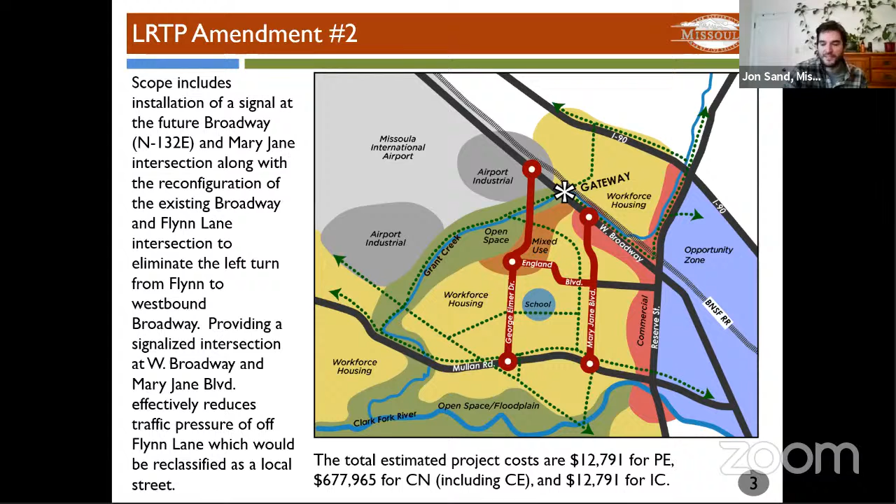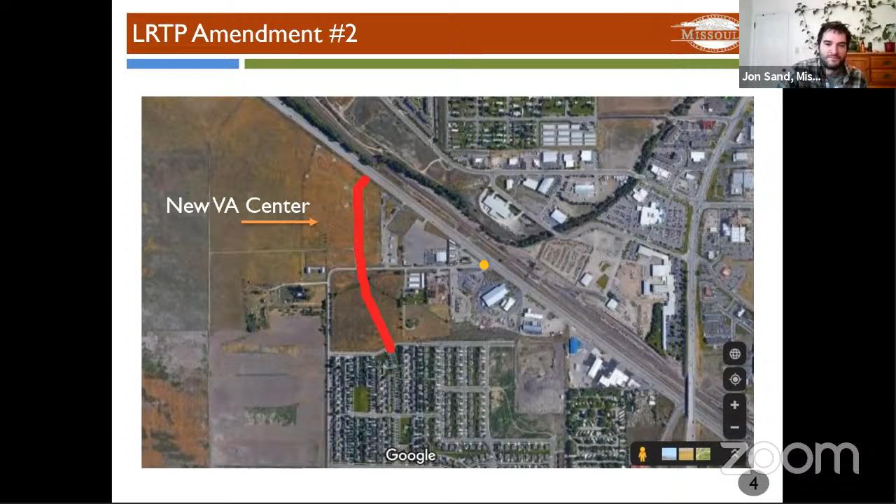Staff recommendation: approve Amendment 2 to the 2016 LRTP as proposed. Option 2: do not approve Amendment 2 to the 2016 LRTP.

I'd like to open it up for discussion, and we have some MDT folks on the line if there are some questions that I am not able to answer.

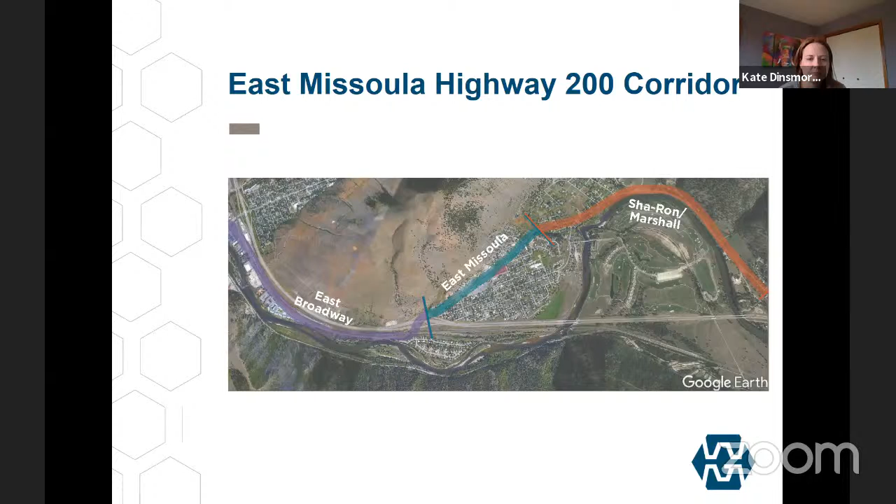We started working on this plan over a year ago, so we're getting close to the end of it. The plan was conceived out of a need to address safety issues. We started by establishing an understanding of the issues within the corridor. Looking back on our process, the first open house was in February, where we asked the public to tell us about the corridor and their concerns. We then took those comments, along with our research of the corridor, and came up with 3 corridor-wide alternatives and detailed options for 4 focus areas identified as specific areas of concern.

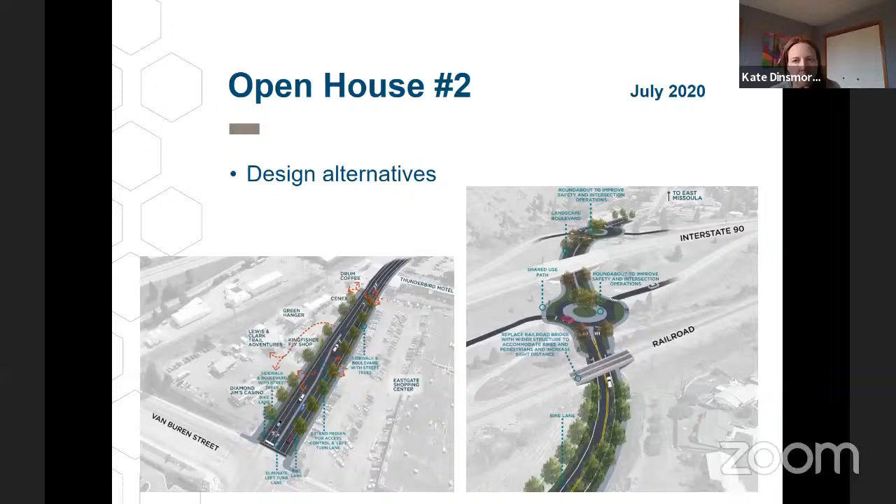During the second open house, we presented these options and asked for comments. We also posted surveys on the project website to create a better understanding of preferences for the design options. We had over 1,200 Social Pinpoint visits - that's the platform we used for public involvement - over 275 unique users, and 196 survey responses and comments.

I'm going to go through a quick review of the responses we received so you can better understand how we developed the preferred alternative. We had 3 corridor-wide alternatives: complete streets, shared use path, and sidewalks with parking. The shared use path was the most popular.

Here's a recap of what the shared use path included. Basically, it was a shared use path from Van Buren to Easy Street, and then a shared use path along the base of Mount Jumbo connecting downtown to East Missoula. People liked this because of the safety aspect and having a path separated from vehicles. They liked having a continuous path the entire length of the corridor. They also thought the shared use path would be a good improvement for both of the other 2 alternatives. The concern is that there isn't necessarily a bicycle and pedestrian connection from Easy Street to Highton Street, so we need to make sure there's still a way to connect East Broadway to East Missoula.

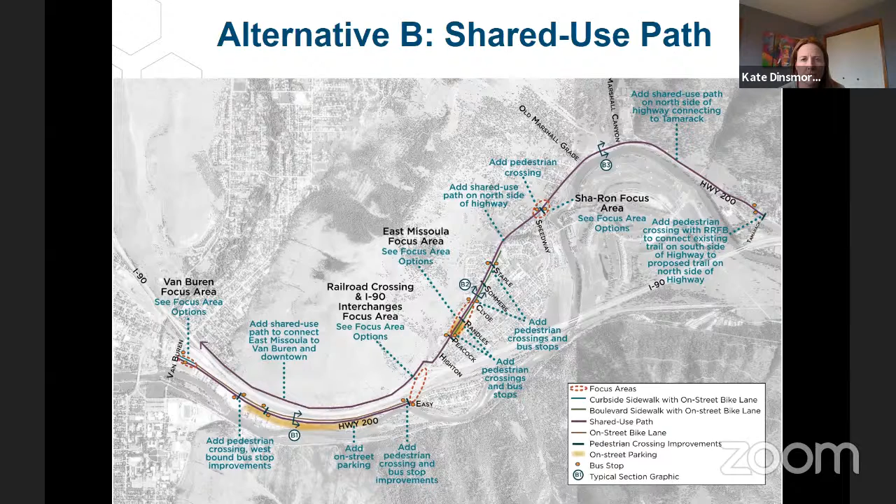Looking at the focus areas, the first one was at Van Buren, the west end of the corridor. Looking at preferences for bicycle and pedestrian amenities, there was a strong preference for a shared use path for both bikes and pedestrians, but there was also some desire to have a boulevard sidewalk as well in that area.

The next focus area was at the railroad and the I-90 interchange area. We presented 3 options here. The first was 2 roundabouts, one at each of the eastbound and westbound I-90 interchanges, along with an improved railroad underpass. The second was the Mount Jumbo shared use path - running from East Missoula along the entire base of Mount Jumbo, and then along Van Buren to connect downtown. The third option was 1 roundabout, which would have been at the eastbound interchange.

This one was a little interesting in that how we packaged these affected how people responded. Because of the roundabout or the railroad underpass, if we had included that with the other two options, I think they would have been more popular. But basically people really want to see that railroad underpass widened. There's a lot of positive feedback for that option.

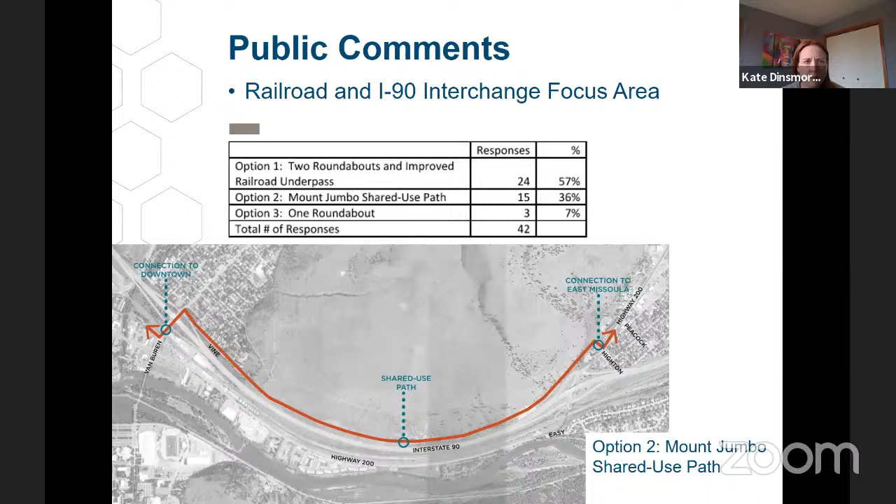Through the East Missoula area, there was a preference for a shared use path, although there's about equal preference for pedestrians between a boulevard sidewalk and a shared use path, and then a strong preference for parallel parking. We also got several comments with differing opinions on the value and safety of a raised cycle track, so there was some indecision about whether that's the right option.

We also talked about, or got comments about, which side a sidewalk should be on, which side the shared use path should be on. And then also some concerns about a shared use path getting congested, with potential conflicts between dogs, strollers, and bikes. So that was a concern.

The last focus area was at Sha-Ron. We had two options here. One was an on-street protected parking lane that leads to the west of Sha-Ron, and the other, option 2, is a parking lot to the east. Basically, there's a lot of on-street parking right now along the street that's creating safety issues as tubers try to access the river.

So option 2 was a little more popular. The reasons for that were it provides more parking spots and gets the cars off the highway, which people seem to like.

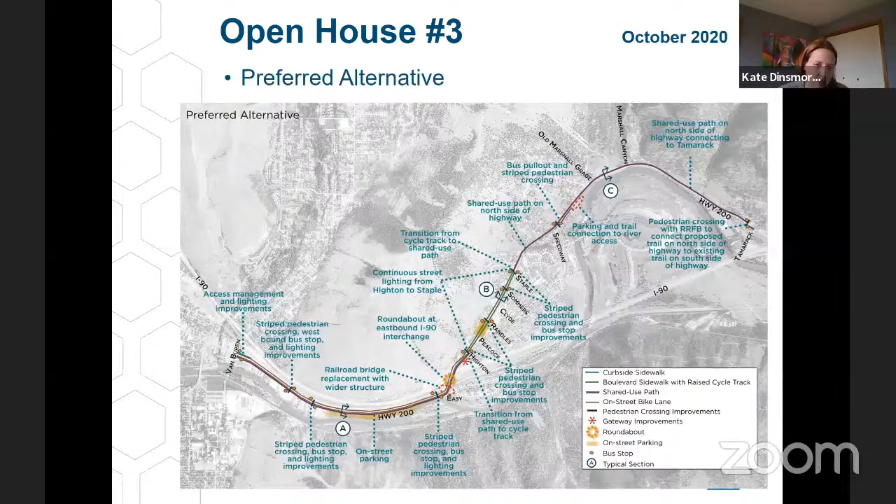So I'm going to zoom into the East Broadway segment now. For this area, there's a shared use path and on-street bike lanes provided from Van Buren to I-90.

The shared use path provides a two-way connection for users that only want to access locations on the south side of Highway 200. The advisory committee felt it was necessary to accommodate how people use the corridor, often beginning and ending their trip on the south side of the highway. This includes students living in apartments along the river and going to classes at the university.

On-street bike lanes cater to commuter bicyclists from East Missoula traveling into downtown for work. On-street parking is provided where existing right-of-way width allows, providing overflow parking for apartment complexes and events.

That area is shown with a yellow highlight, and we'll need to take a closer look at this with the final design to determine exactly where parking is needed. The committee chose to prioritize the eastbound on-street bike lane over on-street parking.

Street crossings and bus stops are improved and will include lighting. We're not proposing continuous street lighting through the East Broadway segment, but instead focusing lighting for improved safety.

Access management near Van Buren is addressed by extending the median to the east and eliminating the left turn lane at Van Buren for vehicles traveling west. This allows for better access control while creating space for improved bicycle and pedestrian amenities.

As properties redevelop, we'll look for opportunities for easements to better accommodate bike ped and boulevard facilities. This is primarily at the Thunderbird, there's a pinch point there. So we know that there's some areas that we just need to be aware of acquiring additional right-of-way or easements as those opportunities arise.

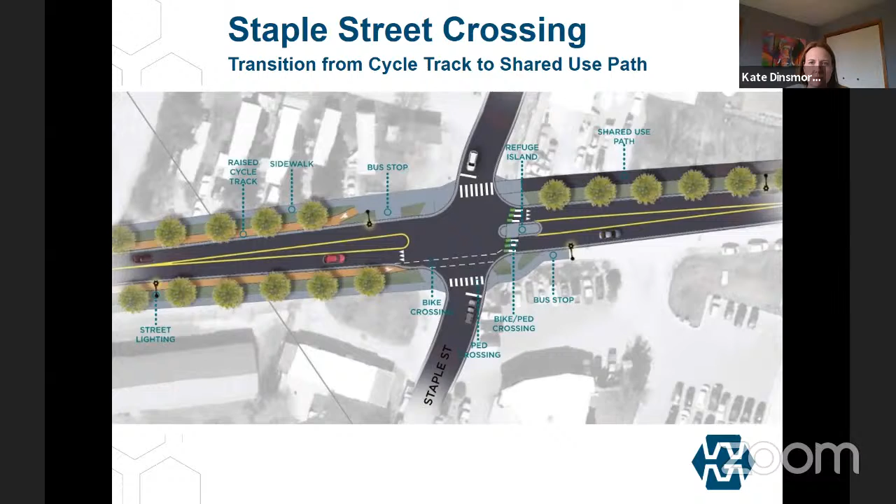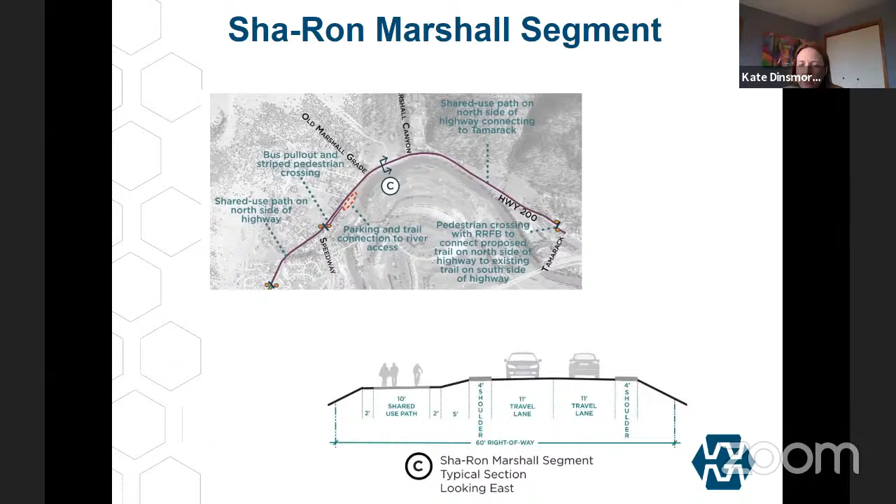For the Sha-Ron Marshall segment, a shared use path is located on the north side of the highway, connecting to the existing path at Tamarack. The path is on the north side to provide better access to existing residences and to address construction feasibility issues where there is limited space between the river and hillside. A rectangular rapid flashing beacon is provided near Tamarack for users to cross Highway 200 and connect to the existing trail east of Tamarack. A new parking lot is provided east of the Sha-Ron fishing access with a trail connecting parking to the river access. A pullout is also provided at Sha-Ron that can accommodate shuttle service.

So taking a closer look at that. This shows the bus pullout, which would serve Mountain Line as well as provide shuttle service for tubers accessing the river. An air compressor could be provided at the bus pullout for inflating tubes. And a trail will connect to a new parking lot located east of Sha-Ron.

On the south side, it wouldn't be as wide as the shared use path on the north side, but there's space that we could do a narrower trail on the south side to allow people to safely connect from the parking to the Sha-Ron fishing access.

And then taking a closer look at the Tamarack crossing, looking at that transition from the north side to the south side to connect to that existing trail. We'd be providing a striped crossing with a rectangular rapid flashing beacon to alert drivers to users crossing the highway, and also have coordinated this crossing with bus stop locations.

And then just a couple other items we discussed with the advisory committee. Maintenance was a big thing through East Missoula, and also the need to work with MDT to get approval for these improvements. We'll include some strategies for addressing maintenance in the final plan document, and as these improvements are implemented, maintenance will need to be addressed.

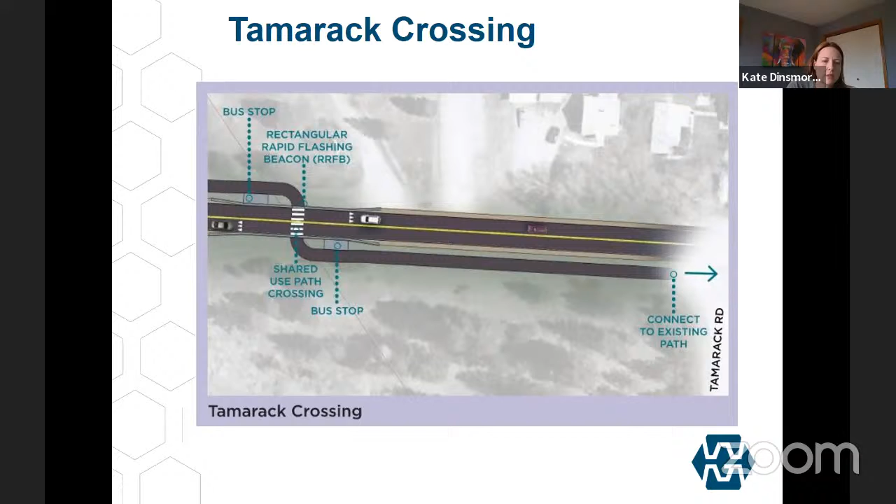So wrapping up, we've just finished getting all the public comments in for the preferred alternative. Now we're going to be evaluating funding strategies and project phasing and implementation, and that'll all go into the final plan document, which will be released for public comment. Planning for that to be the beginning of January. Then we'll have another comment period before it goes through the plan approval process. And then at that point, we'll be looking for funding, and then it goes through the whole engineering design process and into construction.

So I think we're excited to be kind of wrapping up this part of the project, and I'm happy to take any questions you have on it.

Thanks, Kate. A lot of good stuff there. Questions, comments?

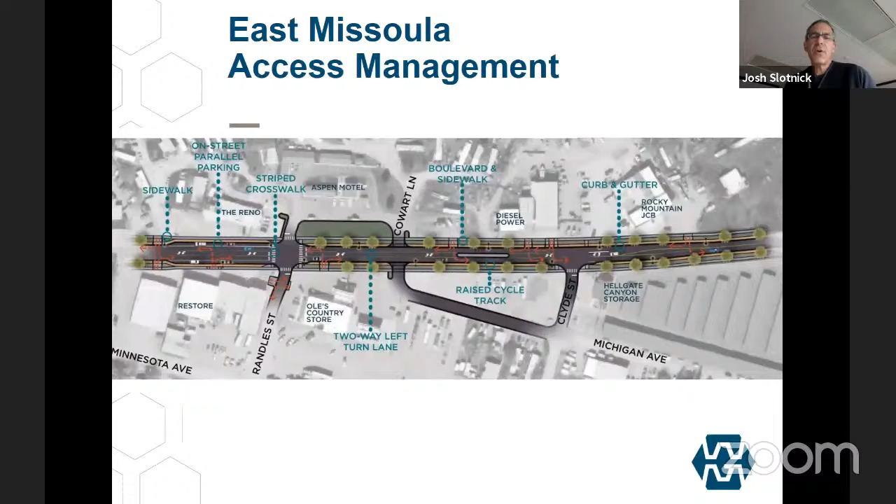Kate, I had a question for you on the East Broadway section. If there's a shared use path, do we also need to have a bike lane? Yeah.

So I think the advisory committee spent some time really considering this and what was appropriate here. And I think the key thing to think about is that this is a unique area, and most of the land uses that are generating activity are on the south side through this area.

So there is a real need for people to have a bike and pedestrian facility that can just connect them on the south side. We don't want people living in the multifamily housing going to school at the university to have to cross the street to get onto the bike lane on the north side, then cross again to go back to the university. If you spend any time out there, you'll see a lot of people already just use the sidewalk as a shared use path because of that.

So we felt there was definitely that need. But then we also talked about the people that are biking in, the commuter cyclists, maybe coming from East Missoula, and thinking about what makes sense for them. We originally were going to have that east or westbound bike lane, and because we felt that made sense for people coming from East Missoula into downtown, we didn't want them to have to cross to get over to the shared use path on the south side. So the westbound bike lane was added to really accommodate that commuter cyclist.

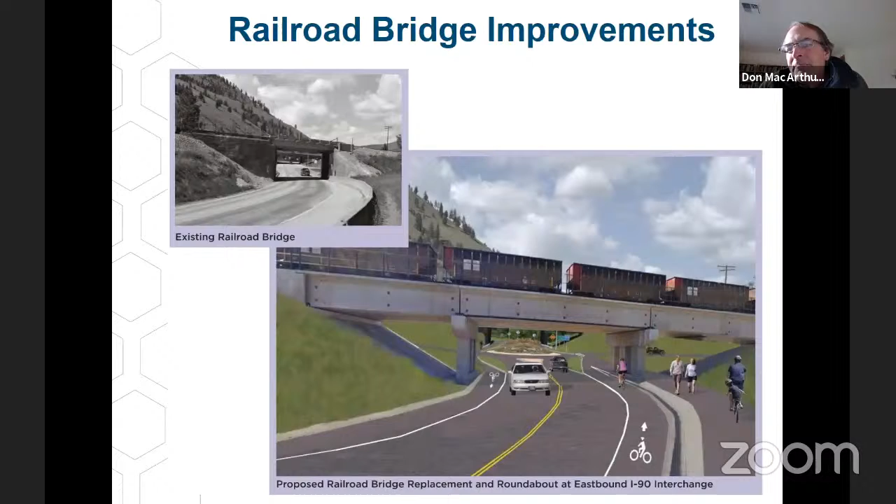So the other question I had, or a couple other questions, thoughts I guess. One of them is around bus stops. It seems like further to the east on the plan, there's a couple places where bus stops are in the - the separated cycle track kind of zigs behind the bus stop.

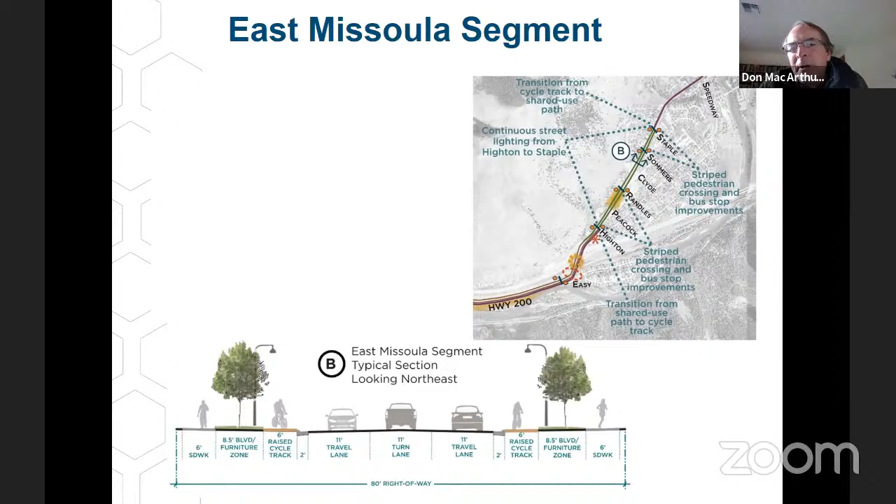I guess I'm wondering how some of these intersections or things are working in other places in the city, whether there have been conflicts. I think Russell Street has some similar kinds of things happening, and I haven't really tracked it. I haven't heard it from the bus drivers that there's any problem, but I wonder if you guys at the city are hearing of conflicts with this kind of transition, where there's pedestrians accessing the bus shelter having a cross motion with the cyclists.

Aaron, you want to take a stab at that? Yeah, I haven't heard any complaints about that.

When we think about it, I think of it as: which conflict are you going to create safety around? Other options you have are basically putting the cycle track out into the street, which creates a bike-vehicle conflict. And we know that when that happens, we get complaints and it's much less safe - it's operating at higher speeds, with vehicles anticipating and cyclists anticipating vehicles as they wrap around a bus on the outside. So this makes just a safer way to interact.

And I think we also just don't typically see the volumes of people going across to the bus stop and cyclists to really create much of a hazard there. There's actually some really interesting video out of San Francisco that shows a transit stop with a protected bike lane that goes through, sort of similar to this, but with the volumes of people coming on and off. I think it might be a streetcar stop, and cyclists going through.

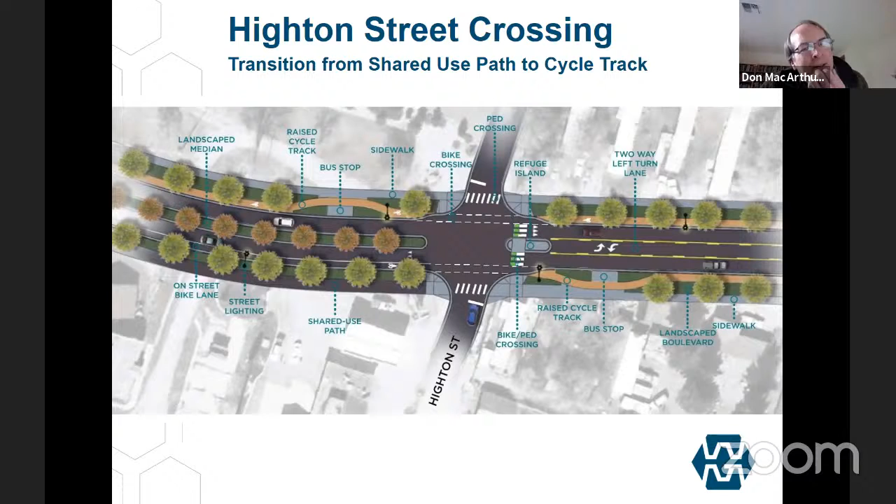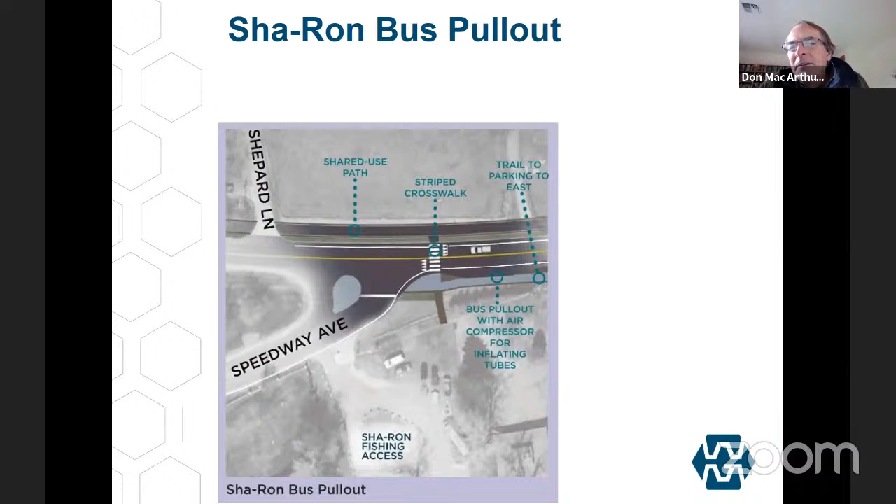It's a lot of different things. And my final comment was around the Sha-Ron area, that it feels worrisome to me to create this remote parking lot that is close to the river, but there's a private owner between.

I just wonder, when I think about other situations I've been in that are like this—if you go to the ocean anywhere, there's tons of people parking along whatever street allows you to get access to the beach. At some level, I just wonder if that isn't the model.

I know it's higher speed traffic, but shouldn't we just pull off the side of the road and have a sidewalk right along the curb—just a wider pull-off all the way along there for some distance? It feels more direct to me than this thing, which I think is going to end up causing a bunch of problems, and probably people aren't really going to park there anyway because it's a little too far.

Well, I guess we'll see. Josh has been pretty intimately involved in this, and believe me, this has been an issue that's caused our phones to ring off the hook incessantly during the tuber hatch period of the year. I think what's proposed here is a possible solution.

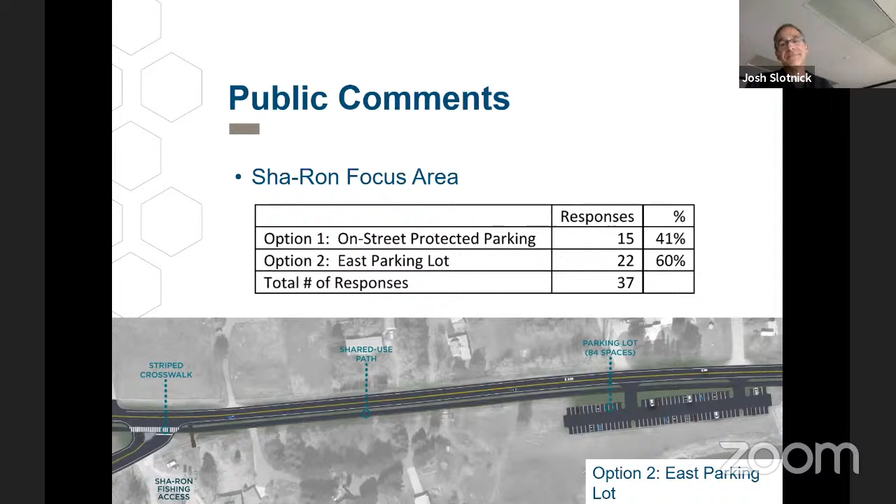And there's definitely a little bit of muddy water here in terms of clarity about how we can do that on a state road. But I felt like there was a path through if we could reach agreement, and we were willing to push on that. So the idea was a parking lot, create a path, a parking resolution, and a fence. We were pretty effective this summer over on Tamarack and Juniper in limiting parking in some very undesirable portions of that roadway, and pushing folks down to the confluence unit of the Milltown State Park.

So yeah, Dave, I want to echo that. We took on the same type of issue, this acute recreation parking issue, with the same set of partners I listed off before, and attempted to educate and then enforce, pushing people to park in one area and not in another. It was really successful. So that gave heart to this effort. Like, oh, we can do this.

There was still some illegal parking there for sure. That illegal parking was on Highway 200, and we did not put a resolution in place because of the muddy water around who enforces. Can a county enforce parking on a state road? Supposedly over the winter, our astute attorneys are going to take this on.

Yeah, the other piece that maybe Kate will talk about a little, is that there wasn't a whole... the comment we received back was not generally supportive of the parallel parking along the side of the highway. So there's that. There's also the cost of building curb, gutter, sidewalk for that whole length, which is going to be definitely more expensive than the other design option.

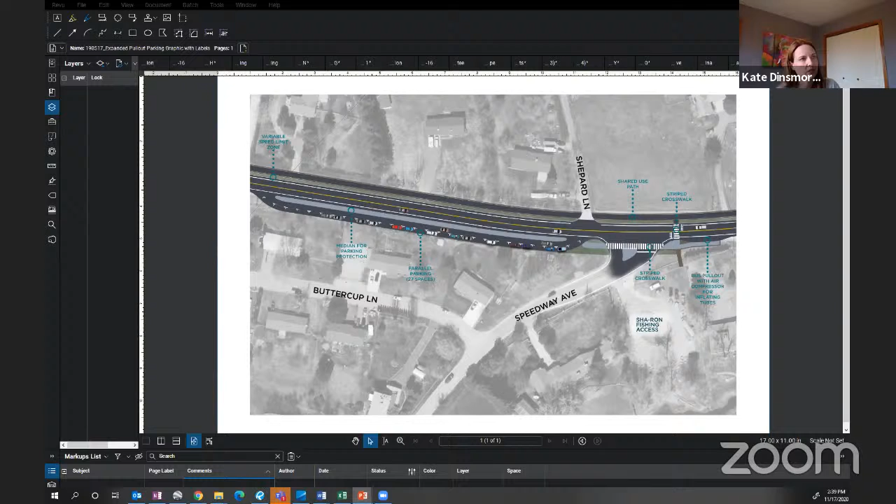So while we focused on those transitions, I think when you actually go out there and see this built, you wouldn't feel like you're going through a transition every few seconds. I think you have to consider that those are spread out a little bit more than maybe how it looks when I present it.

Aaron, you want to add to that? No, I think that definitely covers it.

The only piece I might add is, especially on that East Broadway section with the shared use path and the bike lanes — we had a lot of conversations about whether that shared use path is on the street or on the riverfront, because we've looked at both of those. Definitely the riverfront has been in the plans and a desired option for quite some time. So I could see this, when we actually get to implementing this project, that it could be that the shared use path is along the river because it isn't that far, but then you still have the sidewalk and the bike lanes for direct travel.

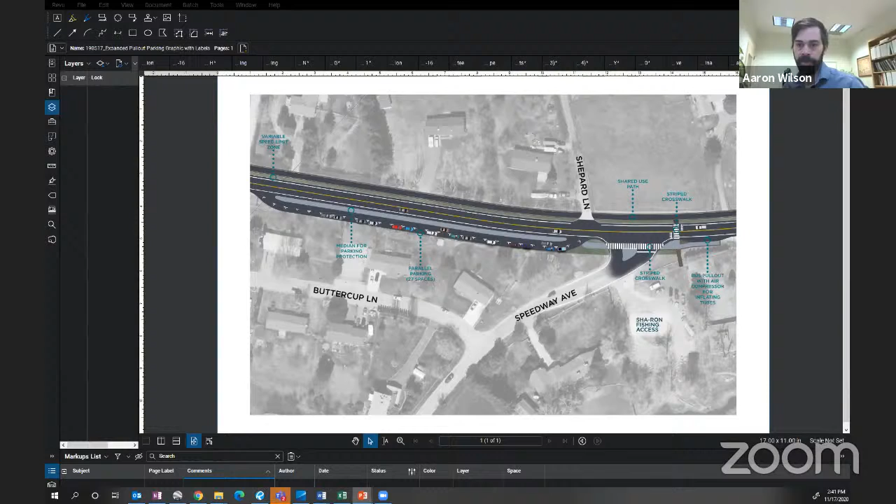For the people who really are comfortable with that and don't really care, they can go through. So I think this design accommodates the land use and the actual behavioral patterns we see from people out there and what they're desiring to do, but also gives us some flexibility to respond to those changing dynamics. So it feels like a good option that will allow us to get the right facility at the right time, but responds to what people were saying — whether they want a protected bike lane or a shared use path. I think people were responding that they want separation, that on-street bike lane doesn't really serve the purpose that most people want it to, beyond the 6% of cyclists that are out there today biking on it. We're not going to get much further unless we do something that's more comfortable.

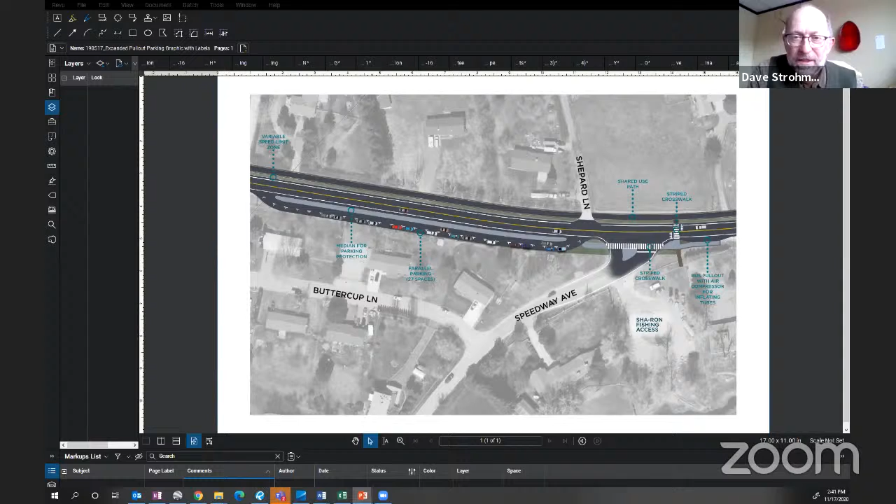Okay, our final item today is a presentation on the 2019 Pavement Condition Assessment Survey and Report. Mr. Gray or Mr. Wilson?

Yeah, Dave had some connectivity issues — I think he's got some people working on his house, so I'm just going to take this one solo today. But it's a pretty quick update. This is a project that's been in the works, gosh, it feels like for over a year now. It took a while to get through, but we're more or less wrapping up this project and moving ahead at the city and county level on what this intends. So this is really just kind of a wrap up for this project for the MPO. I'll go over what we did, what came out of it, and how it's going to be used in the future.

So the purpose of this study, just as a reminder since it's been a while since we talked about it — there's a couple of overlapping purposes, and this is a good example of a partnership in an area where the MPO can help the city and the county with their activities while we're moving ahead with the work that we do. At the MPO level, we really needed a good measure of pavement condition and our pavement performance measures, and we haven't had a very great data source to rely on outside of what MDT collects for their routes. Locally, it's been hit or miss and not consistently collected, so this gave us a data source we could be confident in. It's comparable to what MDT collects for their facilities, so we've got a good comparable data set.

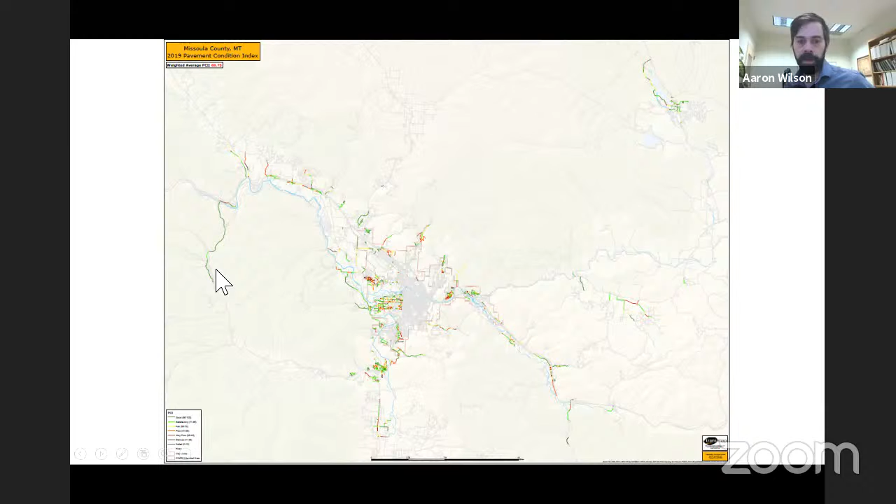And within the MPO area, we collected that data for really every segment of roadway that wasn't MDT owned and that was paved. We didn't collect unpaved roads because there's not much point getting pavement condition for a gravel road.

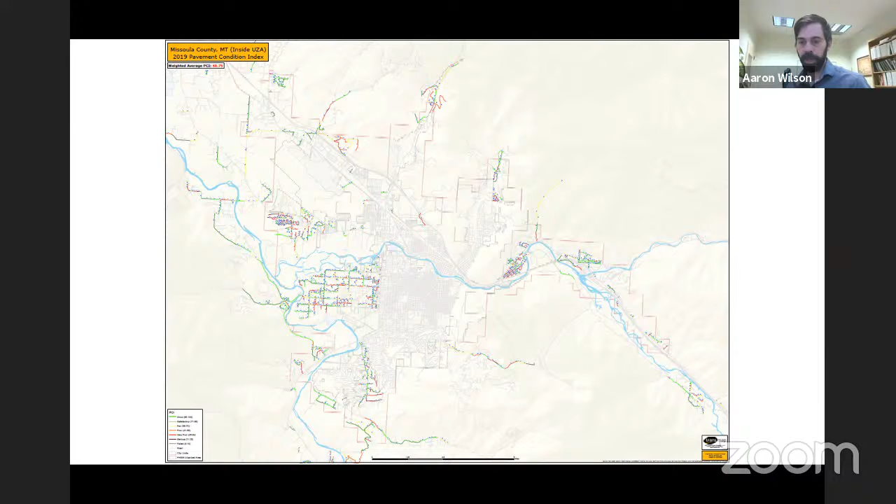So I'll skip over some of these maps. One of the nice things about this data is that we were able to get it into our GIS system. And it also came with street level photography.

So we have a number of different data sets that went into the pavement condition.

It was, I believe, cracking, rutting, and I can never remember what the other measure is. But essentially, there are several measures that go into a complete, what we call a pavement condition index. That's an overall condition.

It's broken down by block, so we can really get into some detail on what that condition is. We can also then look at, say, here's an example of that map. We can see what the PCI condition of that segment is. This is 5th Street between Grant and Johnson, I believe.

And then we can actually go in and look at the street level photography to see what that condition actually looks like. So it's a way to help kind of verify that the data is actually true to life out there on the street.

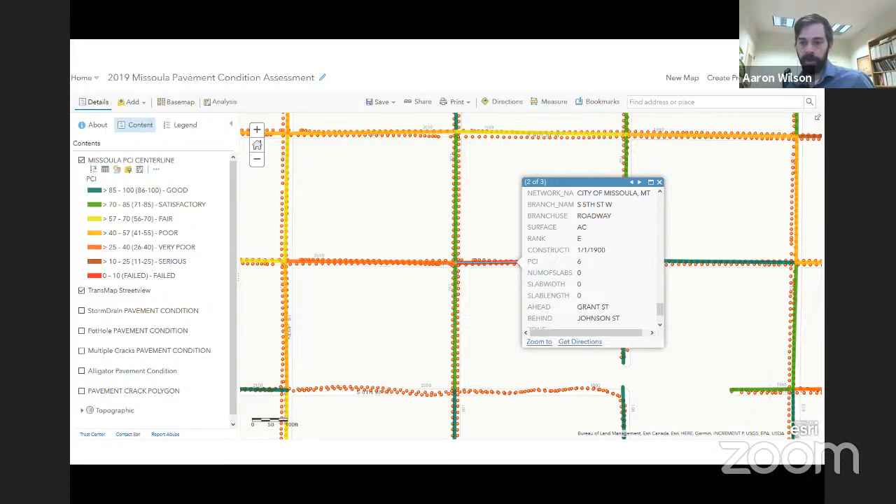So it's a really useful tool, not just for pavement management, but now we have this data set. We can really look - every one of these dots on this map is a street level photograph. So they were basically doing what Google does as they went along scanning the road. They were also taking photos. So it's a really good data set that we can use for managing our pavement condition system.

So there's also some other added benefits of doing these inventories. It costs additional money to do it, and we didn't have the funding available at the time, but we can go back - the data has been collected, so we can get these inventories.

So they collected LiDAR data as they went along, and so we can use that to get traffic sign inventories. We can look at street paint conditions, storm drains, manhole covers, curb, gutter, sidewalk, ADA. So all of those things can be extracted from this data set.

All of those cost money, but it's a good way to think about all of these different inventories and how much detail do we need and where do we have gaps.

We can also use these to help with other problem identification. So thinking about sight obstructions at intersections, if there are zoning complaints and we need to go in and look at that street view, we've got that updated photography. And then, as we mentioned, the pavement condition is ultimately the goal of this project, or was the goal.

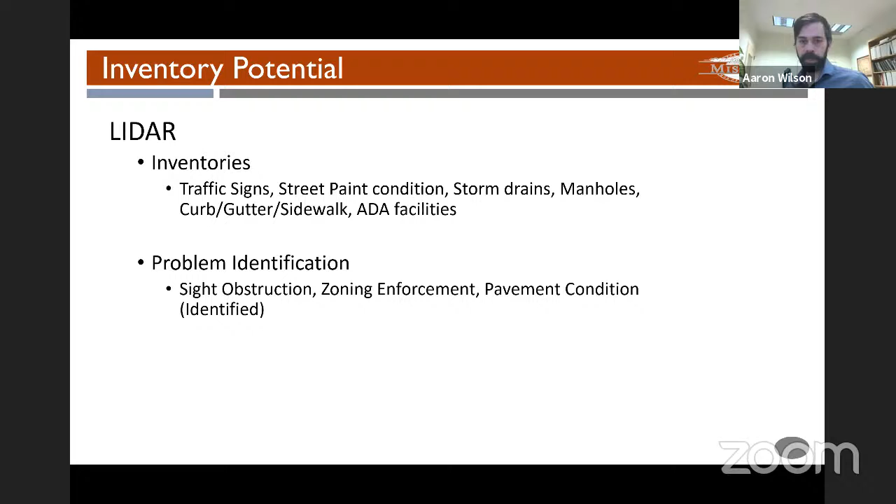So part of the benefit of this, particularly for the city and the county, is doing better with pavement asset management. And so it's using this PCI index, this standardized data collection methodology, to develop some modeling and do more of a data-driven approach to our pavement maintenance.

And I believe the commissioners have had a presentation on this from the county side and what this means for county budgets. But we can look system-wide at what our PCI ranges are. So we can look at these by different types of roads, like collectors versus local streets. We can get a sense of where we are today.

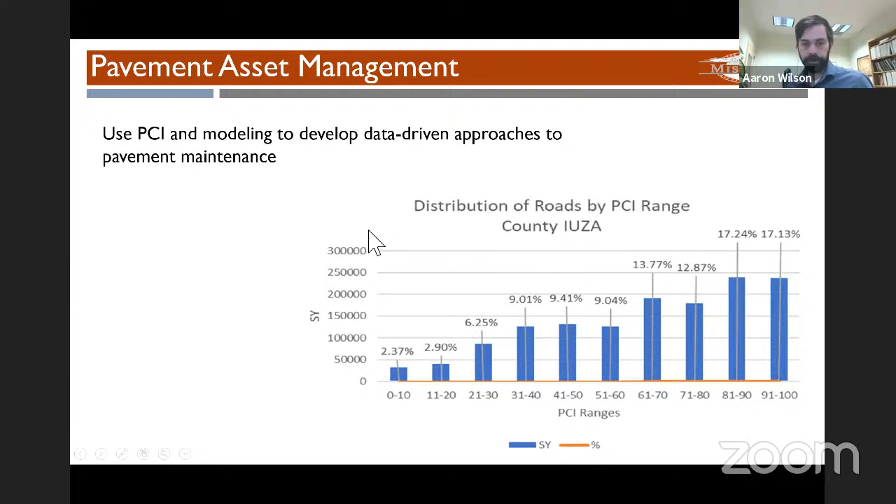But then we can also use modeling software, like something called MicroPaver, which is one tool, and it was what was used for this project. That takes all of that PCI index, and it looks at the cost, unit costs for different types of maintenance activities, and it looks at deterioration rates for pavement and how quickly our roadway condition is deteriorating over time.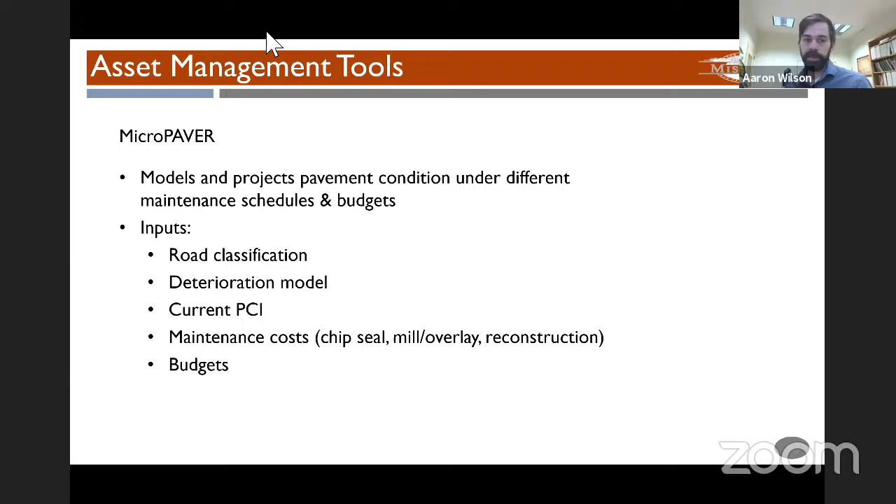And what happens if you don't maintain a particular section versus doing a different kind of treatment and what that costs. So you can input all these different elements like the road classification, that deterioration model, our PCI index, the maintenance costs, and our ongoing budgets. And then it comes up with estimated costs for what it would take to maintain all of those roads.

And it does it in a couple of different ways. One is just what's the overall cost? If we wanted to bring every street up to a good PCI condition, what does that cost throughout the whole geography you're looking at?

Whether it's city, MPO, or county roads. So it gives us essentially what's our deferred maintenance today in terms of bringing our condition up to a good standard. And it shows that there's different costs for when roads start to degrade far enough, then you go from sort of a standard chip seal kind of maintenance that's fairly cost effective, and it might drop it down to a more expensive maintenance activity.

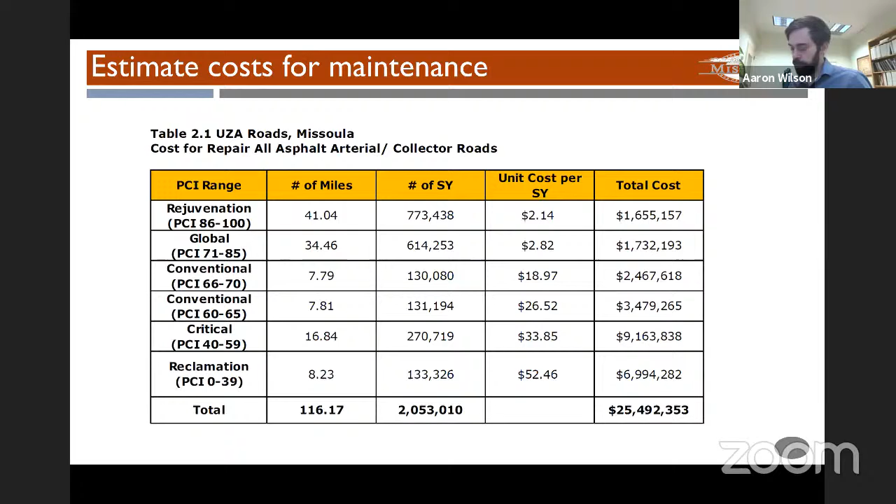And so the longer you let roads go, the more expensive it is to bring them into good condition. So the software is able to look at what's the most efficient way to maintain our roads in terms of balancing that, keeping some roads in good condition and bringing others up to that higher PCI level.

I'll talk a little bit more in a minute about how to interpret some of this. It's a model and it's taking inputs, and the outputs you get are really only as good as what you're putting into the model. And this is the first time we've done this, so there's some caveats to some of these projections.

So it's giving us a sense of what it's going to take to achieve some different targets, which is not something that we've necessarily had in our toolbox before.

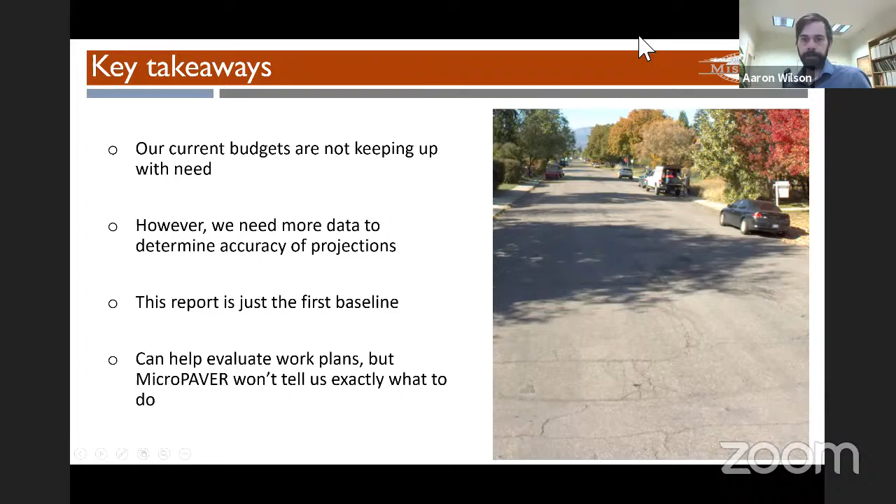Well, I just was sort of— a lot of these modeling things have a tendency to make the sky seem like it's falling. And I guess, after living here for 27 years, driving the roads, I don't feel like we are on the trajectory that shows. I guess the mayor probably is more in tune with the general level of complaining within the city about the road conditions, but it feels to me more like we are staying level, or maybe a very slow loss of quality in roads, but not as aggressive as that model shows.

And I guess my question was just wondering if there's any way to do more than my anecdotal going backwards. I mean, we know what we've spent over the last 25 years, and I'm wondering if there's any way to tune our model up with some level of forensic information that might be available about the quality of streets we've actually tracked over time.